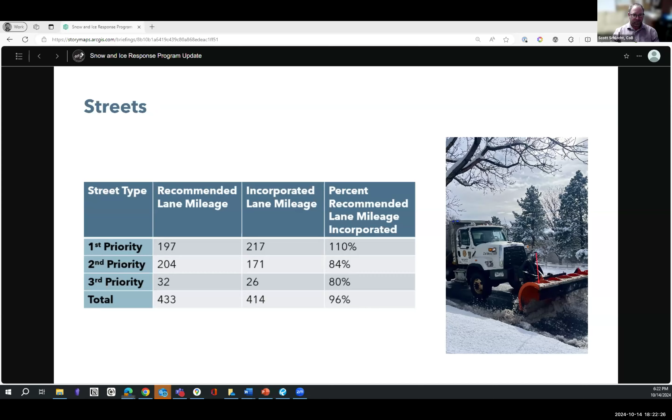Beginning with the streets and small storms up to 3 inches, first priority criteria are all street segments that are high traffic, serve critical highway and arterial emergency response routes, and/or serve high ridership transit routes with stops of 50 boardings and alightings or greater per day. And those will all be cleared within 12 hours of snow stopping.

With the first priority, our goal is to clear to bare pavement for all of the streets included in the first priority. One of the things that we heard from TAB previously was a consideration of safety and how we respond to storms. We did analyze these first priority routes to confirm that all street segments on the Vision Zero Action Plan high-risk network will be cleared as first priority.

First priority streets are primarily serviced by tandem axle plows, including a winged plow. We do include one smaller plow vehicle that is used to address some smaller streets for bike connectivity.

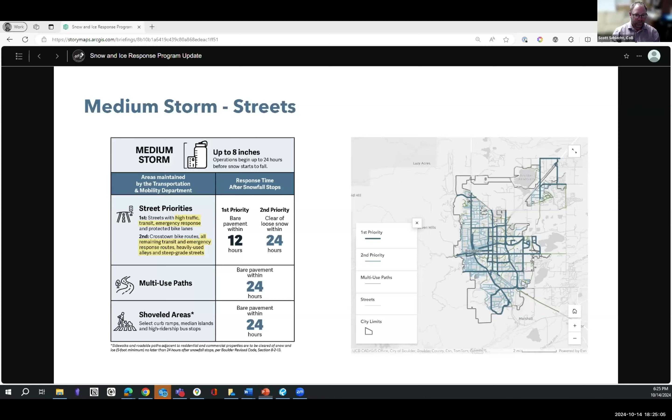Finally, during large storms, first and second priority streets would continue to be cleared. Third priority streets are added, which consist of street segments with grades between 4 and 6.5%. These third priority streets would be cleared within 48 hours after snow stops.

With that, I will pass it along to my partner, Daniel Sheeter, to walk through the bike and pedestrian areas.

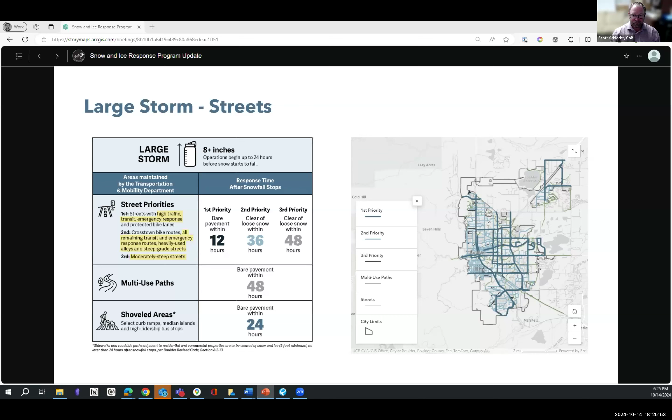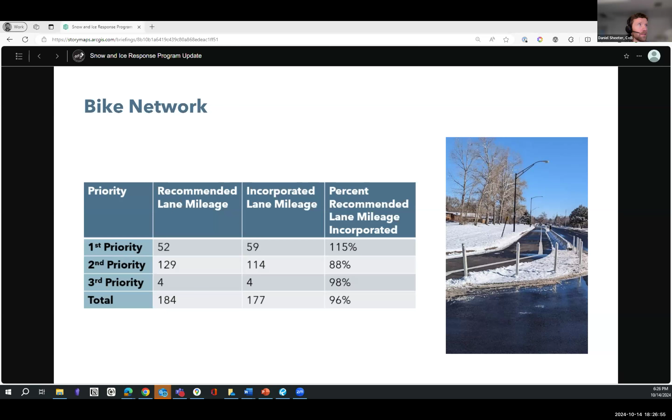That includes some of those higher traffic streets or streets with transit and emergency response routes that Scott covered, if they have a bike facility on them, like painted bike lanes. An example of this is Table Mesa and Valmont Road being highlighted on this first priority bike network map.

Multi-use paths are also a key part of the city bike network and are shown as well in green. Per the table, all paths maintained by the Transportation and Mobility Department will be cleared to bare pavement within 12 hours. This component of the program has the same level of service as previous seasons.

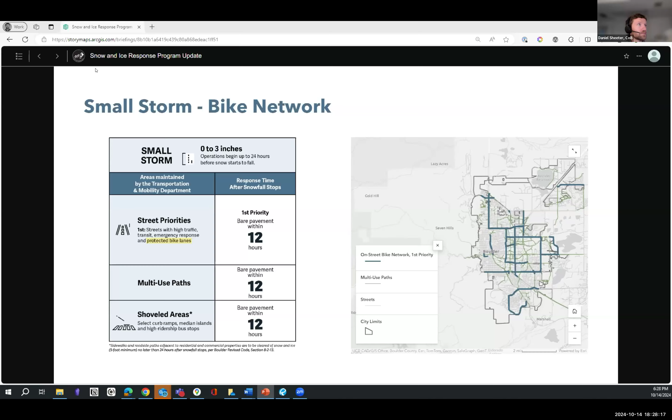Moving on to medium storms, this is where there's a significant expansion of the bike network being cleared as crosstown bike routes are added as a criteria. This new bike route designation was developed through the project to be an input to the bike criteria in order to identify gaps in the existing plow network from preceding seasons and improve connections between on and off-street bike facilities. You'll see the term again later in tonight's agenda when you receive an update on the city's new bike map.

First priority routes will of course continue to be cleared with these medium storms, and all multi-use paths will be cleared within 24 hours for these medium storms.

I don't have a slide for large storms as it relates to the bike network, but since that only adds moderately steep streets, it has kind of limited impact on the bike network, but a few more miles are added there if they overlap with those moderately steep streets.

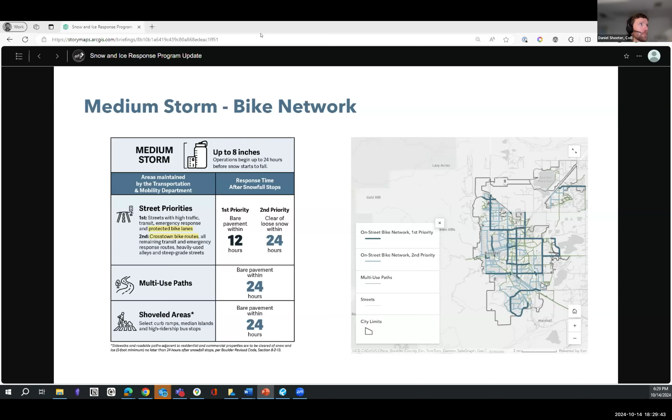Related to the bike network, some additional key gaps identified in the on-street bike network are being added to the 24-25 operations plan within the existing budget as an operational feasibility trial. These gaps were highly requested for snow clearing during community engagement and will better connect the network of lower stress bike facilities that are accessible during the winter.

This pilot, just to demo the interactive nature of the presentation, which was linked in the packet, includes the connection between 19th Street and 26th Street via Upland Avenue and Tamarack Avenue in North Boulder, 15th Street just south of Iris Avenue, Juniper Avenue east of 26th Street, and then finally Old Tale Road and Gapter Road along South Boulder Creek.

Staff will be testing a variety of methods to clear these segments this season and will track positive and negative feedback received from the community to inform operations in future seasons.

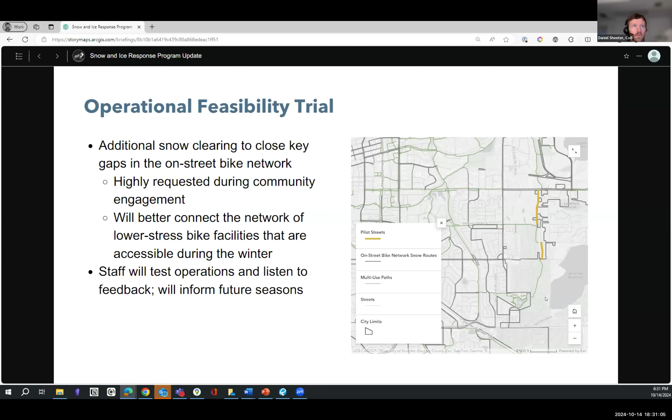Transitioning to the final component of the program, shoveled areas. For this season, city contractors will clear snow from almost 200 locations. Volunteers and partner agencies like RTD and CU Boulder clear snow from about 150 bus stops to complement what we do with our contractors.

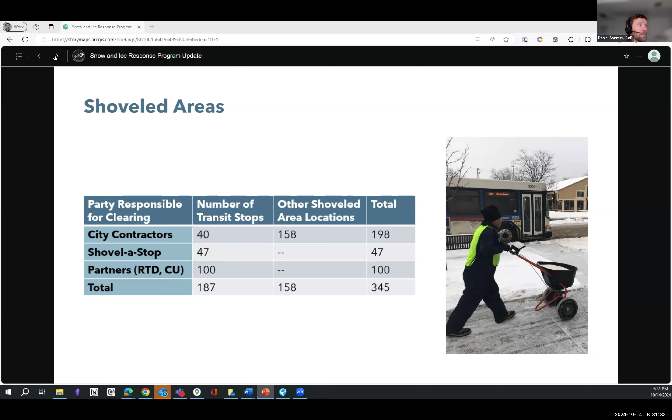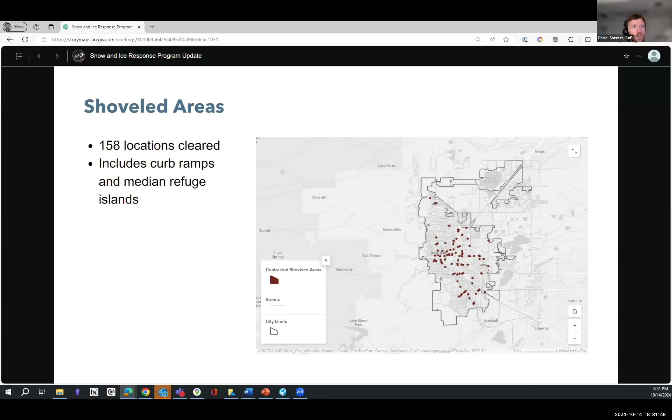158 of these locations are small or constrained spaces where using larger snow clearing equipment is not feasible, such as select curb ramps and median refuge islands. And these are shown on the map to the right in red.

There are an additional 40 high ridership bus stops that are also cleared by contractors. We're currently working with members of the National Federation of the Blind and the Center for People with Disabilities to identify an additional 5 stops to be added to the program that do not meet the ridership threshold.

As part of communications for this season, we'll also expand promotion of the Shovel a Stop volunteer program with particular priority placed on medium ridership stops with more than 35 riders per day. The map shows the full network of 187 bus stops that are proposed to be cleared this season by city contractors in blue, volunteers in red, and RTD and CU in yellow.

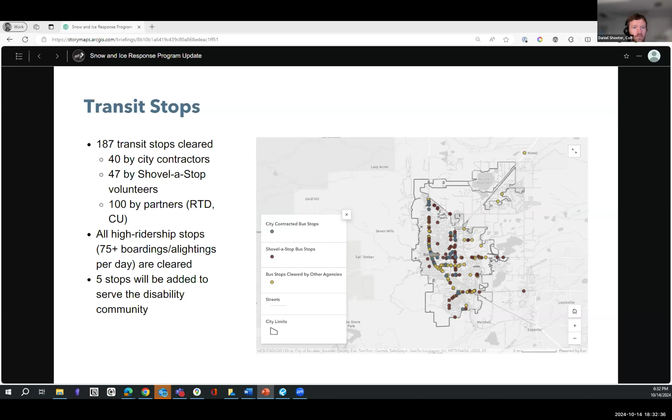I would also like to share an update on analysis of the recommended program in comparison to the city's racial equity index. So when looking at each program component, whether that be streets, the on-street bike network, or shoveled areas, there are increases in service across all equity priority levels, with the highest increases in the highest priority equity areas. These findings are detailed in the memo that accompanies the presentation.

Moving on to next steps. As Scott mentioned, staff are finalizing materials to communicate program changes to the community, and so the storm size graphics you saw tonight will hopefully be familiar come next spring. There's also a new interactive web map in development right now, and we're putting the finishing touches on that, and that will display the plow routes that correspond to each storm size, that small, medium, large framework. That'll be launching in the next few weeks and will sync up with the graphics that we displayed tonight.

That brings us to our one question for the board this evening. Do you all have any questions about the recommendations that informed the 2024-2025 operations plan that we walked through in this presentation?

Thanks very much. Dan and Scott, that's helpful and concise, lovely. Mike, I see your hand is up.

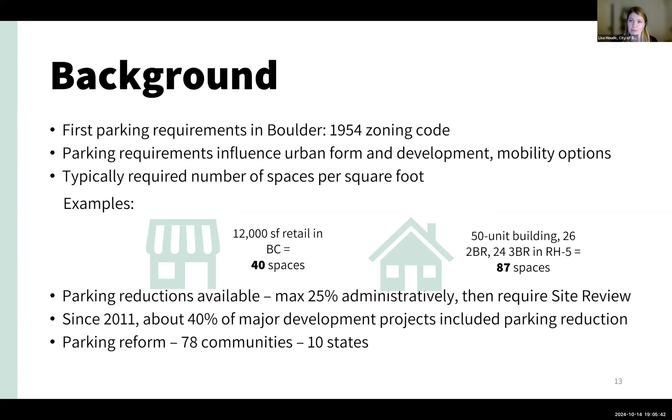States have also been taking note of this and passing legislation related to minimum parking requirements, and Colorado is one of them. This year in the state legislative session, they passed House Bill 24-1304, which prohibits minimum parking requirements if the property is at least partially located within what they call the transit service area. This only applies to multifamily residential development or adaptive reuse of an existing structure for residential use or majority residential use.

The transit service area that city staff estimated based on the bill, you can see at the right in the map as the blue area, and that's about 81% of city parcels. Since I created this slide, the state actually produced their official map, and it's very similar to this, with just one route we counted along Valmont that they didn't count. So pretty similar numbers to what we expected, but again, a majority of the city is within the transit service area. The bill states that cities must comply by June 30th, 2025, so the timing aligns very well with this project.

The reason this has become such an important part of the planning and zoning conversation is that many studies have shown that local minimum parking requirements increase vehicle miles traveled, greenhouse gas emissions, and development and housing costs. A study from Metro Denver showed that a surface parking space, just a parking lot, costs $10,000 per space to build, and a structured parking space adds $25,000 to the cost of development per space. So if our requirements are so high, so far beyond what's actually needed, that's significantly increasing the cost of housing.

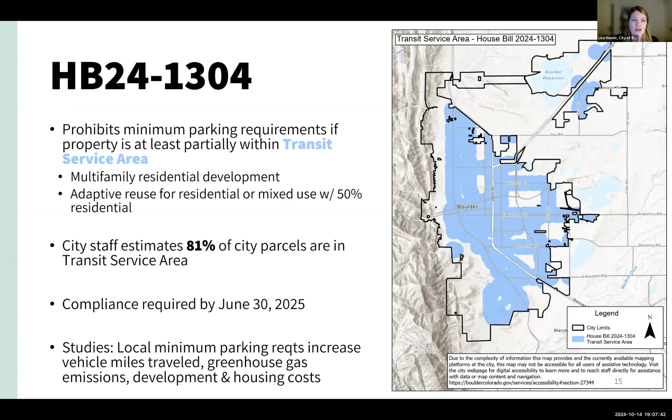I mentioned that data collection has been a really important part of this project over the last 10 years. We have looked at over 16,000 parking spaces at 50 different sites throughout the city. Over these last 10 years, we've looked at peak times, off-peak, and specific times of interest. For the next few slides, I'll just focus on the peak times. I just wanted to give a quick overview.

Thank you, yeah, I had a question. Is this averaged over a 24-hour period? What's the time that we're looking at?

Yeah, so it's peak time. Our consultant went and did it, so I don't know the particulars of everything, but yeah, it's the peak occupancy time, and they did multiple counts to get an average. There's multiple sites too - I think except for medical office, there's multiple sites for each land use, so some have 8 or 14 or whatever. So it's an average of all of those sites and what their occupancy was at peak time.

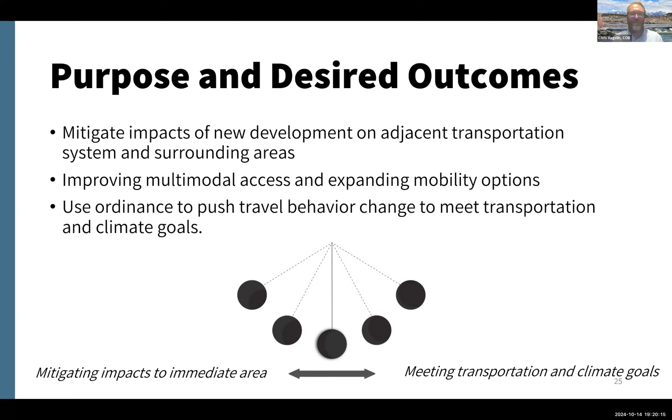Next slide, please. Another thing we want to talk about tonight is the triggers and thresholds, using a different heuristic device, the dial. This is always one of my favorites, the policy dial. How far do you want to turn or crank that policy dial? They all have different implications. This is really about the triggers and the thresholds.

We have all different types of development in our community, and we can think of the number of development projects that come in, and how many of those this new ordinance would apply to. Would it apply to every single development? Or do you turn that dial a bit so it applies to your medium and large developments, while smaller ones with relatively little impact don't get so much attention—maybe just a couple requirements, but not ongoing monitoring? You could turn the dial even more so the ordinance only focuses on your largest developments, those with significant impact not just in the area but citywide—think of a CU South type development, where we establish a trip budget and monitor and enforce those things. There are a lot of different factors to consider when deciding where to turn that dial.

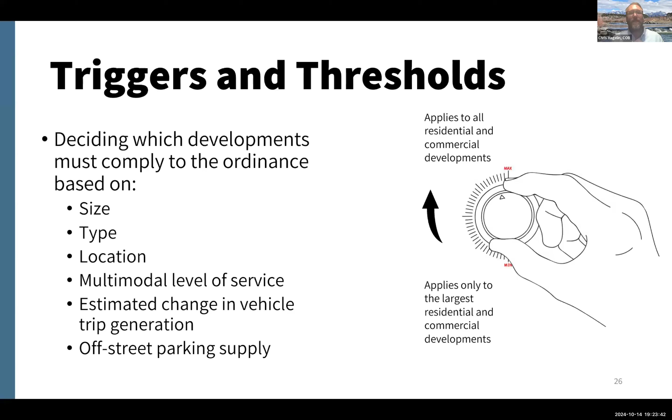So our proposed scope for this project, we've been working on it for a while, but is essentially to use a best practice approach. We have that in the works right now. We'll have a little preview from our consultants at Alta. We really want to focus on not just mitigating impacts, but how do we improve multimodal access and mobility and access, most importantly, to those TDM programs that we know are really effective in changing travel behavior, things like the business EcoPass, the residential EcoPass, combining that with bike share, micro-mobility access, all of those things. We want to increase access to those programs.

Staff is looking at a tiered approach where there would be some exemptions for projects of the smallest size, but that we would have a tiered approach that as the development increases in size and impact, those requirements would ratchet up along with changing where that target level is where we would measure whether or not a building is in compliance or non-compliance.

Next slide, please. So I do want to bring in Ulla Hester, who is with Alta. She's going to give you a preview of our best practices. Ulla was part of Urban Trans way back in 2014 when we originally did the best practices research. So now with Alta, but we're glad that they're on board to look at best practices for TDM plan ordinances across the country and world. So Ulla, please take over.

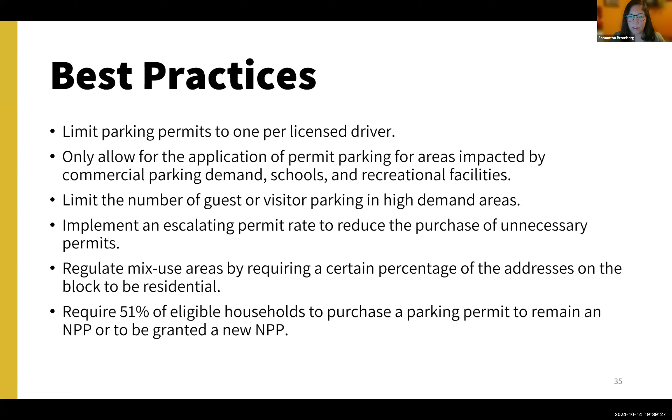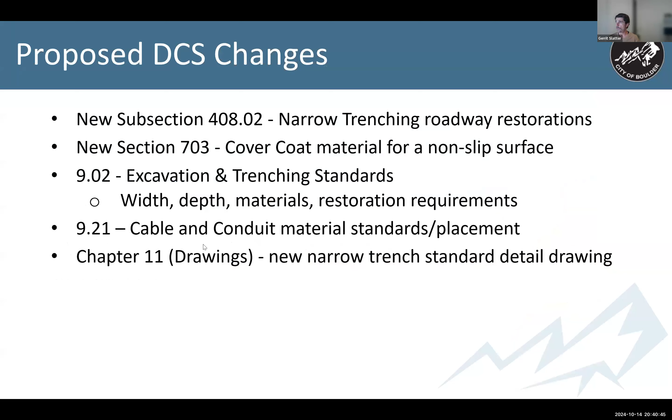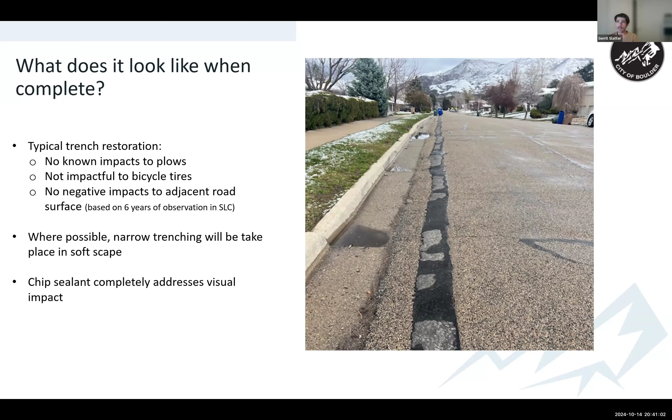So from here, our next steps are to provide an informational update to Planning Board. Then, with the feedback we get from Transportation Advisory Board and Planning Board, provide final updates to this DCS update and request City Council recommend and approve these changes to the DCS, which will occur by ordinance, hopefully in November.

Our question for you is, are these DCS updates consistent with city and transportation master plan goals and objectives? As a reminder, our highest priority in terms of investment in the transportation master plan is to provide system maintenance to preserve the integrity of our infrastructure, streets and bridges, system operations, and maintaining safety, as well as to maintain the investment we've put in place over many years and decades. So that's our question for you, and happy to take any feedback.

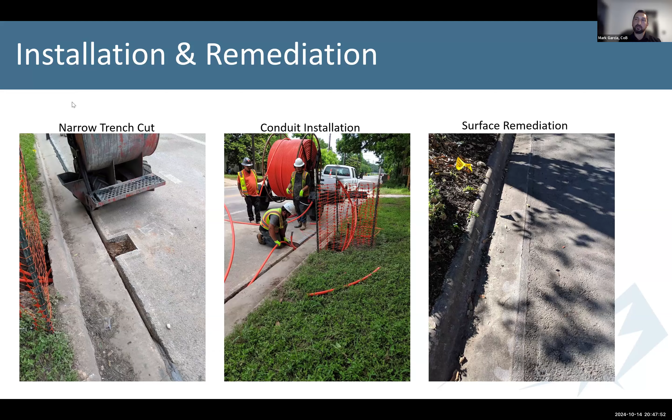There's definitely different options that can be done for narrow trenching. This has been determined one of the least impactful, one reason being that you're avoiding the wheel paths where there could be potential impacts to the infrastructure. Going down the wheel paths, if you were to move this out a little bit further, ideally it's going to line up with the separation of all the other utilities, because those are still factors that have to be put into place before they even decide where this is going to go. So if there were a water main right below the curb line, it wouldn't be an optimal location because it wouldn't meet the standards of separation.

So there's actually multiple options that can be done. The lip line's one that was just called out as more ideal because it's not actually making an additional cut in the roadway. It's leaving it on the lip line of the curb where it's easily sealed, and it just leaves a cleaner look to the street.

And as Gerrit mentioned in the presentation, keep in mind the whole bike lane scenario. If they're in a bike lane that's less than 3 foot wide, they do have to mill and overlay that entire width of the bike lane and replace it with new asphalt. If it's a larger bike lane, and that trench is really just right there on the lip line of the edge, they're not required to mill and overlay that section.

But again, there's so many bike lanes in town that are pretty narrow. Most of those are on main corridors where this is likely not going to be seen. And if it were to actually take place in one of those bike lanes, it's going to be milled and overlaid.

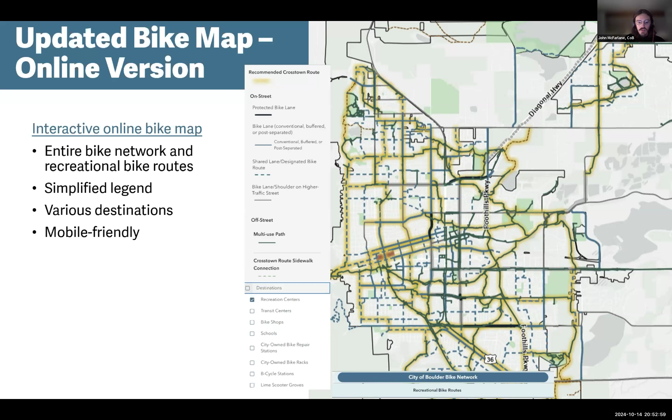I'll just play a quick video demonstrating the Track My Ride feature. There's no audio to this, so you shouldn't be hearing any. This is an example of someone tracking their ride in the new interactive version on their phone, which is pretty cool if you want to remember what routes you've taken.

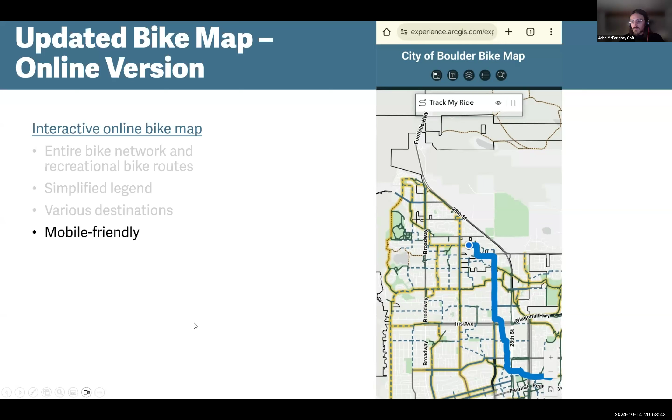Similar to the online version, a focus of the print map is the recommended crosstown routes, with the goal that it is legible and intuitive for someone to use it to plan their trip by bike. The print version also features a subset of destinations from the online version, rather than the full range someone might want to bike to.

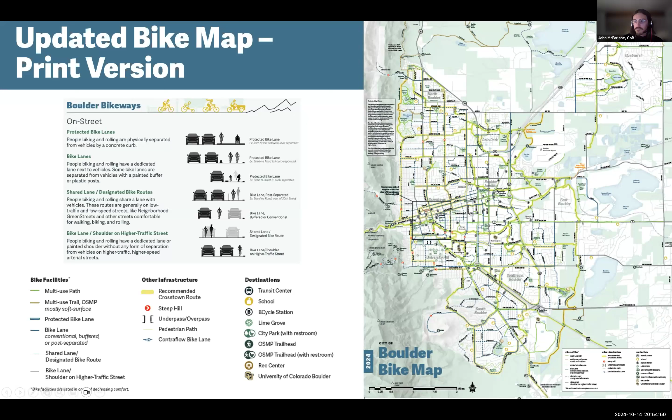This includes recreational walks developed by Boulder Walks and points of interest such as public art, notable trees, and transit and micromobility options if someone wants to walk to connect to those transit options. The online version is also mobile friendly, similar to the bike map.

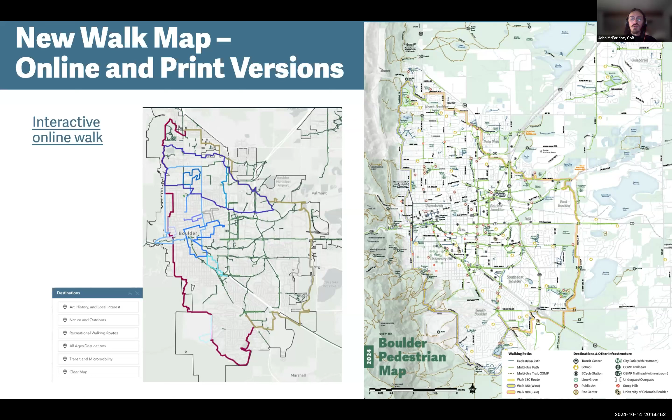The print version, shown on the right, highlights the Boulder Walk 180 routes and destinations such as transit centers, city parks, and open space and mountain park trailheads. It also contains additional information on the back of the map about walking in Boulder, and has a QR code to the online version to help inspire community members to explore Boulder by walking or rolling.

Other points of interest on the map include park and rides and popular destinations accessible by transit, such as trailheads and neighborhood centers.

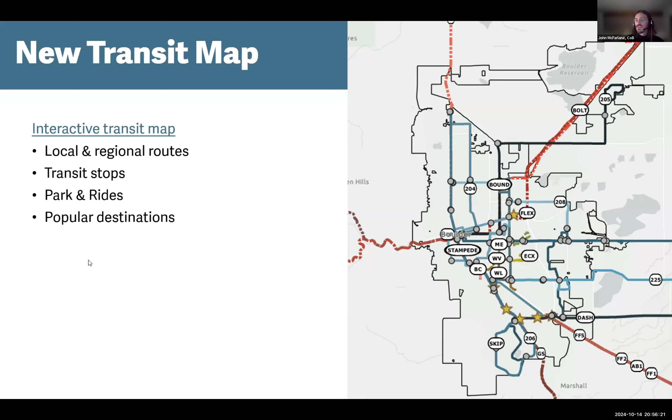A key feature of the transit map is being able to click on a route and receive information on service levels. Here's an example of clicking on the BOUND route on 30th Street and getting information on the days of the week and times of day that service is provided. You can also click on bus stops, shown at the bottom here, for schedule information for routes serving the stop. The new transit map better highlights the many transit options in Boulder, and we think it'll help people plan their trip by transit.

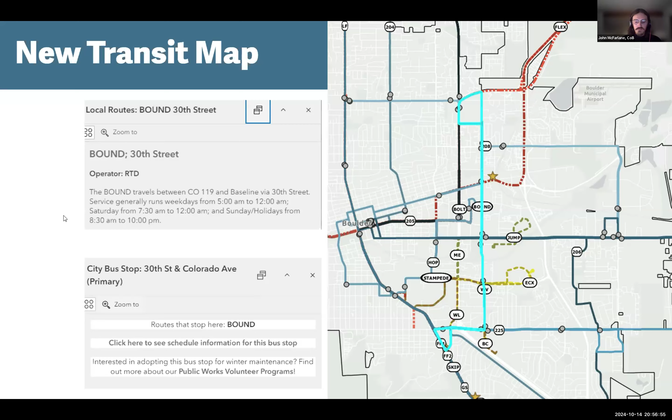Next steps for these updated maps include distributing them to the community. We've begun to share print versions of the walk and bike maps with our community partners, local bike shops, and at recent in-person engagement events. If any board member would like a print copy, please reach out to me, my email is listed, and I'd be happy to coordinate getting you one. As mentioned, we're receiving feedback on the print walk and bike maps, so I encourage you all to review and share any feedback you may have. This concludes my presentation, and myself and other members of the project team are online and happy to answer any questions.

Thanks very much. Trini's had her hand up for forever.

I had this idea when I saw this and didn't want to forget. This is amazing, and I'm so happy it's available digitally. I think it could be such a useful resource for other things, including gathering data. I know there's going to be privacy concerns and all that, but if people are using these apps or this resource to track their journeys, could we somehow ask them to share the data, so we have an additional resource to know where people are moving and what routes are used most, by foot, bike, and even transit. We could apply that to our snow removal prioritization, going back to the beginning of the meeting, for those corridors. I know we currently use other data sources, but this would be an interesting one to integrate into the data we already have.